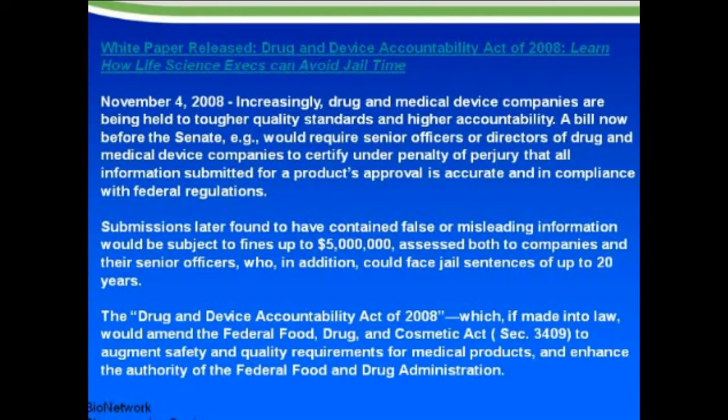Okay? If you think that what we do on a daily basis isn't important, that ought to tell you something right there. I'll tell you what. If I was a manager or a director in a pharmaceutical company right now, that would scare the living daylights out of me. And it would make sure that I did everything right. Okay? I just wanted to share that with you.

How do we assure that we're compliant or complying with current good manufacturing practices? Well, we comply by following the risk-based approach to CGMPs that was published in August of 2002. We design quality into our process on the front end. We don't wait in our industry for something to happen, although that sometimes does happen, before we fix a problem. We're required by the FDA to build quality into our product on the front end.

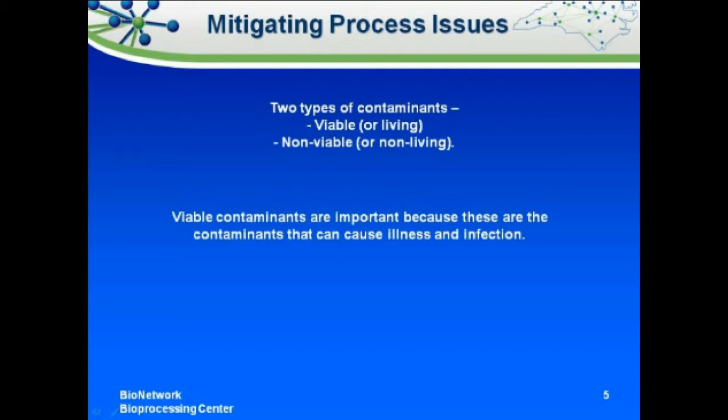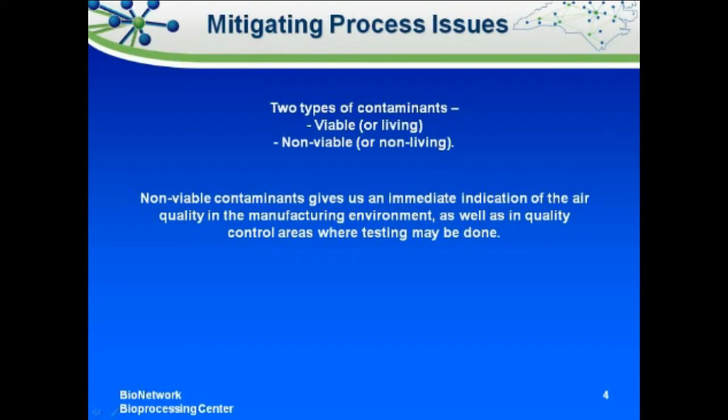Now, I told you this morning that I was going to talk mostly about viable contaminants today, but I wanted to just make sure everybody in the room understood the difference between viable and non-viable contaminants. Viable contaminants are those that are living, and non-viable are not. When we have a particle counter in a clean room and we're sampling particles, we're sampling both.

But the viable contaminants are what I want to talk about today, because my business was in making injectable drugs, and injectable drugs have a potential of greater harm than something that's made as an oral medication. Now, obviously, we don't want contamination at all when we're manufacturing products, but injectable drugs have a greater potential because of the route of exposure. It's faster into the body.

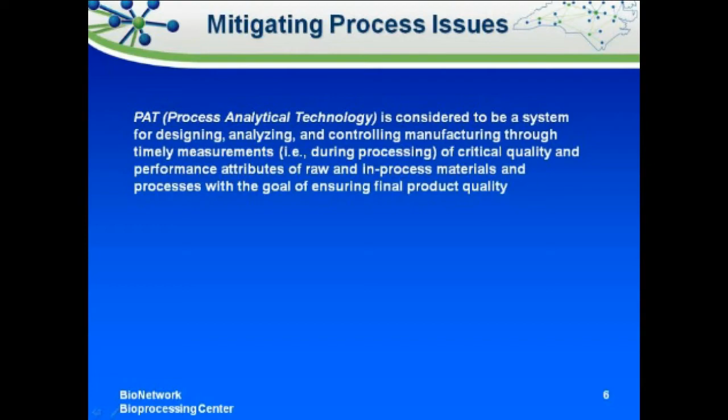And I also wanted you to know a little bit about process analytical technology, considered to be a system for designing, analyzing, and controlling manufacturing through timely measurements, while we're processing, of critical quality and performance attributes of raw and in-process materials and processes, with the goal of ensuring final product quality. It's all about quality.

Well, how do we know we have a quality product that's free of contaminants? Well, we test those products after we've manufactured them to make sure. We take a certain representative sample and we'll put it through tests to make sure that there are no contaminants. But we don't want to even have to worry about that on the front end, and we do something that is a process simulation called media fills. So I'm going to talk briefly about media fills.

Now, I have a lot of information on these slides that I could go over and take until 4 o'clock. But then the other speakers would probably be ready to shoot me, and you would too. So I'm not going to do that.

But everybody will have these slides and the notes that go with these slides available to them at your asking. If you're interested in it, I have everything you need to know about media fills in the notes in these slides. Not all on the slides, but in the notes.

So what about risk? All particles, but especially viable contaminants that may grow, I want to talk about today. That's our area of concern. Media fills are an aseptic processing operation that validates the process using a microbial growth medium as the simulated drug product. Typically, who's doing media fills in their process now? So everybody's familiar with media fills. What are some of the media that you use?

Tryptic soy broth. Anyone doing anything for anaerobes? Fluid thioglycolate? What else is being used? Anything? I'm sorry? SDA, okay.

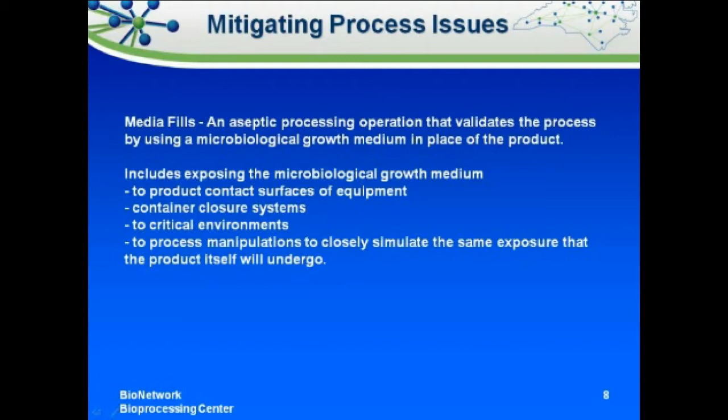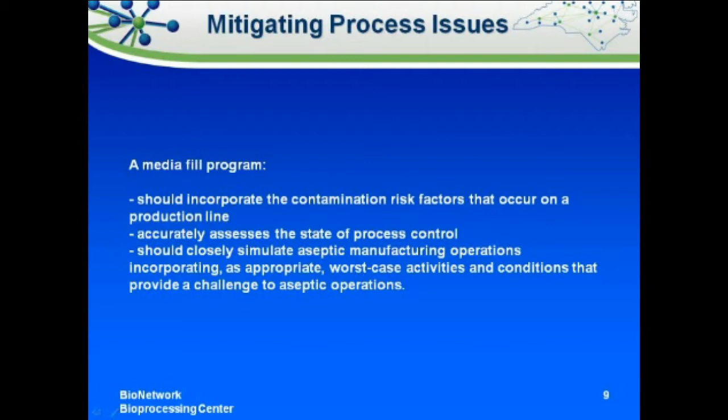This includes exposing the media to the containers that we put it in, all the piping or tubing that we use when we're doing our filling; any surface that the product comes into contact with is part of our media fill. And any manipulations we put it through. A media fill program should incorporate the risks that we normally see on a production line and should assess the state of our control. Media fills are all about assessing our process control and should simulate aseptic manufacturing operations that we do on a daily basis.

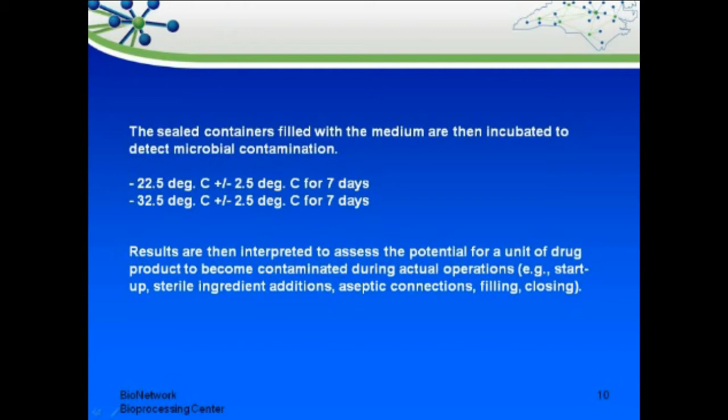Sealed containers will be incubated to detect microbial contamination. And I've heard some people say, well, we don't do it this way, but this is what the FDA recommends. 22.5 degrees, plus or minus 2.5 degrees for 7 days. You take those vials, move them to a 32.5 degree C incubator, plus or minus 2.5 degrees for 7 more days. Obviously, you're going to inspect them after 7 days at 22.5 degrees.

By the way, these vials are inverted. Does everybody know to invert their vials? That way we're assured that the media comes into contact with the stopper on the vial. And if there's any contamination in the stoppering process, the closure, then we can assess that too.

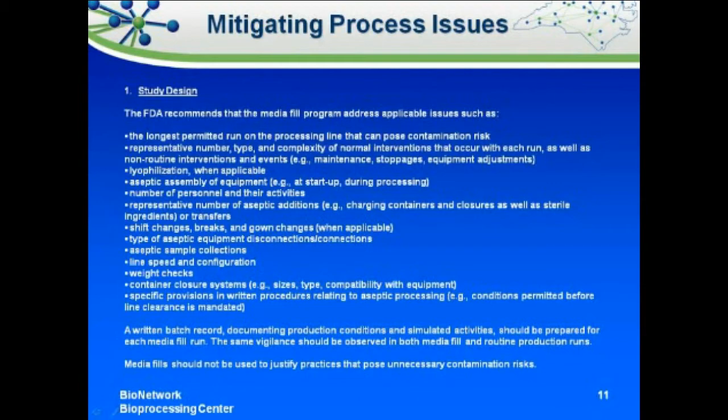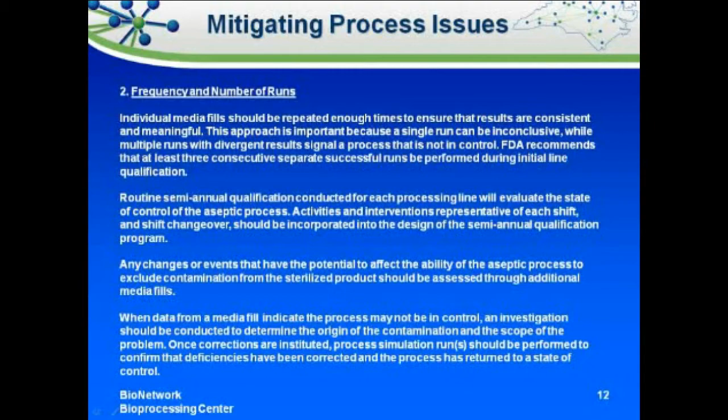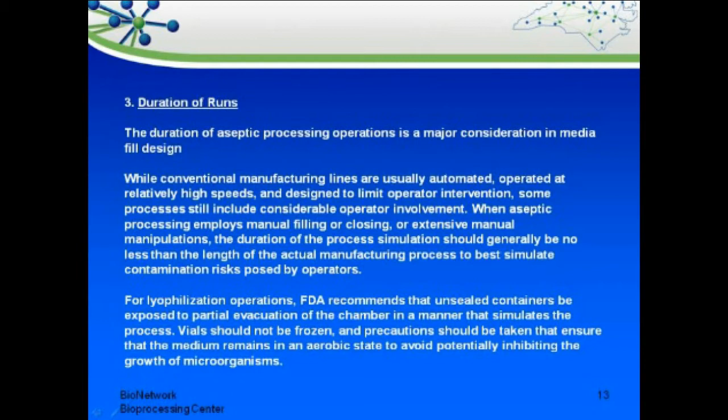Okay? The duration of the run must be assessed. How long does it take you to run your fill? If it takes 6 hours, are you going to run a media fill for 5.5 hours? No. You're going to make sure that you run your media fill at least as long, and probably a little bit longer than the normal duration of your filling run. And the reason for that is if you're filling a drug product and something comes up and it takes a little bit longer, you want to make sure that your media fill validates the fact that it's okay to run that filling a little bit longer.

The size of your run. If you're filling a 10,000 vial batch, you might want to fill an 11,000 vial batch. You kill 2 birds with 1 stone there. It's probably going to increase the duration, and it's also going to give you a larger sample selection in the size of your run.

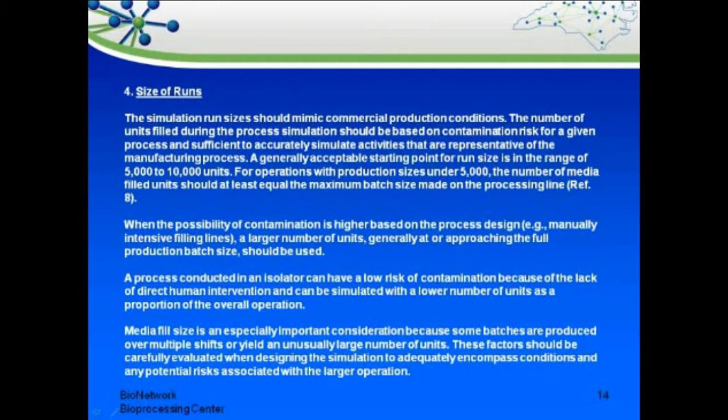The line speed. Sometimes it might be slower, sometimes it might be faster. In a media fill, you want to make sure that you vary your line speed from time to time so that your media fill will validate the fact that a drug run could run a little bit faster or a little bit slower. And I know, from the number of hands I've seen here, this is probably just a review for you.

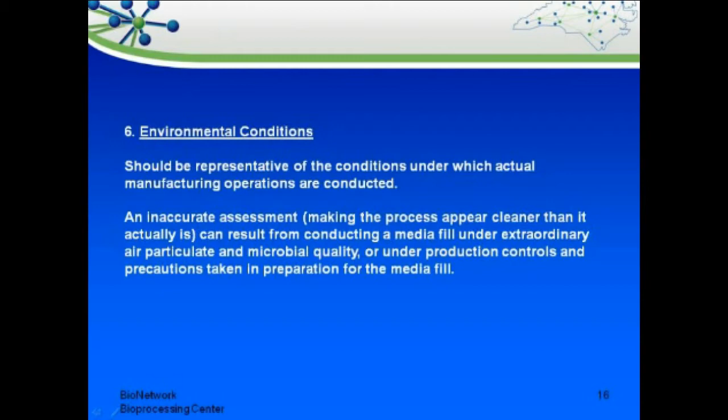Environmental conditions: the representative conditions under which actual manufacturing operations are made should be met on the media fill. Okay? You don't want to have something at 75 degrees Fahrenheit if you normally run it at 70. Okay?

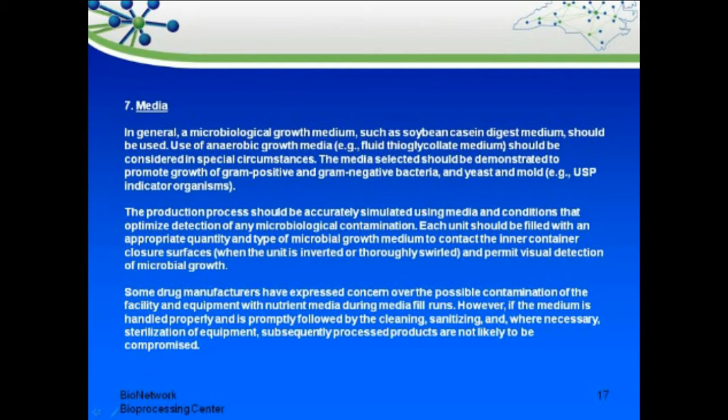The type of media that you use should be appropriate for the type of bacteria that you're encountering in your facility. Fluid thioglycolate is oftentimes used for anaerobic bacteria. Incubation and examination of the media filled units: they have to be incubated at the temperatures I said for a total of 14 days at the 2 different temperatures. And your vials need to be inverted. They need to be examined after a period of 7 days.

What kind of examination do y'all do on your media fills after 7 days? Count. You do counts if you have growth. But what if you don't have any growth? Do you inspect 100% of your vials? And what do you do? You look at your vials. If they're turbid, you've got growth. If they're not, so it's just a visual inspection, right? Does anyone do anything besides a visual inspection? That's all you need.

If you got growth, what do you do if you find one vial in 10,000 that has growth? Another media fill. Yeah. Now, do you, while you're doing your media fills, log what's happening on the filling line for each of those vials so that you can go back and say, oh, I might have 3 vials that are positive. What was going on when those 3 vials came up positive? Okay. That's what you're supposed to do.

When I was doing media fills, when I worked in industry, that was probably one of the hardest things to do, was to record everything that was going on during the filling run so that I could go back and track it to a certain group of vials that I was working with. Fortunately, I didn't have very many positives, so that was good.

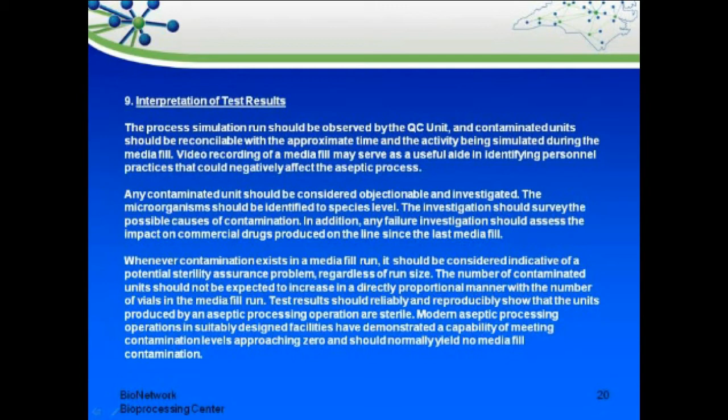Incubation and examination, I've got some more information here about that. I won't go through all that. Interpreting the results I just talked about. It's a visual interpretation. If you end up after 14 days with a positive, what do you do? You investigate, you rerun. Do you identify what it was that contaminated the vial? Absolutely. Because the microorganism that contaminates the vial could help you determine the source, which could help you determine what in the process caused your problem to begin with. And then you can make that correction.